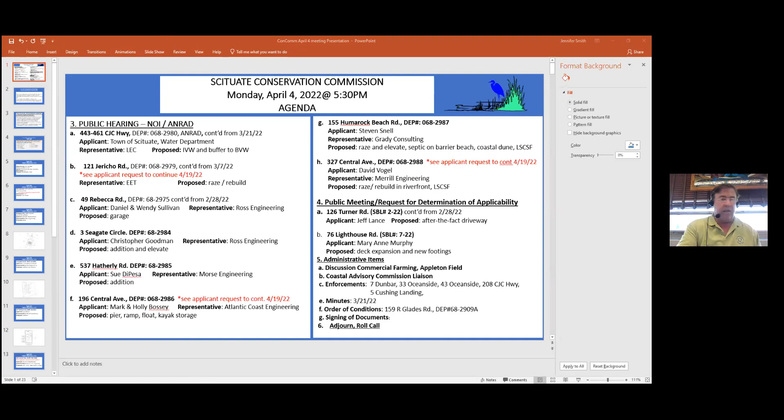Thank you. So we're going to go right to Mark Manganello from LEC. Just before we start, I know that there's been interest in this meeting, and I just want to make sure I explain clearly that this hearing this evening is only to delineate, accept a wetlands delineation line. This has nothing to do with any proposed project or whatever early stages.

In a format like this, the first thing that happens is that we establish what we would consider to be resource areas and delineation of the wetlands. That's all we're going to be doing this evening. There's no discussion about any other possibilities or whatever. It's strictly what we call an ANRAD for that. So the applicant is the town of Scituate, and their consultant for this project is Mark Manganello.

So Mark, if you want to explain what you've done so far. Thank you. Yes, again, I'm Mark Manganello with LEC Environmental, representing the town with this ANRAD application. As has been indicated, this is an application seeking to confirm wetland resource area boundaries on this property. It's located on the west side of Route 3A, just north of Tack Factory Pond. It's undeveloped land at this point.

We delineated the resource areas out there last fall into the winter, and the site contains a few isolated vegetated wetlands which have formed in historic test pits or other land disturbance that's occurred out there over the years. And then there's a more traditional bordering vegetated wetland that is associated with the pond, and riverfront area associated with a perennial stream which flows into the pond at this point, where there's sort of a dog leg on the southernmost portion of the property.

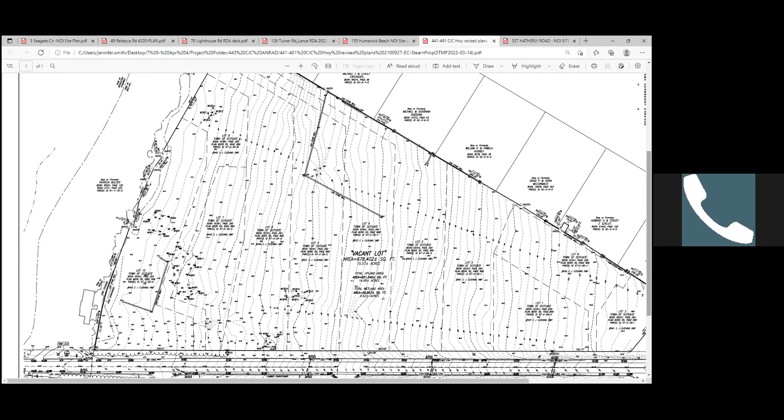So the main resource area is Tack Factory Pond. But when you look at this plan, there are a few areas, maybe more in the southern section, maybe one sort of centered, that have a bunch of WF flaggings around them, making some kind of circle. Those areas are what we consider isolated wetlands, not joined directly to the pond or anything. You'll see a few little spots around the property with wetland flags, and they're relatively small. As Art pointed out, they're probably depressions from some site work. There's maybe a bit of a larger one down towards the little stone wall section to the south, a couple of bigger ones closer to the pond, and then a few other small ones. That's how best, I guess, to explain those.

Okay, let me start with the members. Penny?

Or Amy, do you want to address any more of this? No, I mean usually I would say we've got Art here, but Art went right into it, so I don't really have anything to add. Let's go through the members first.

Okay, so Penny? Can you hear us? I know Penny was having those technical difficulties. Is she still on, Jen? Well, I'm gonna jump from Penny to Jen.

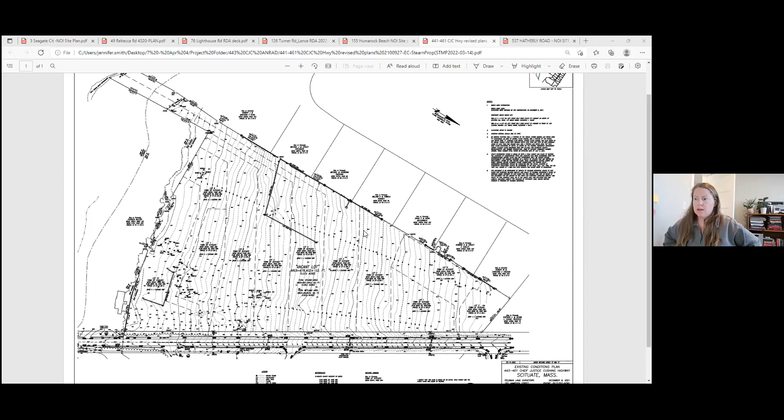Yeah, I think it seems relatively straightforward from a resource areas standpoint, because that's specifically what we're talking about today. So I think I'm good.

Okay, Andy? No, I appreciate the effort that went into the review. It looks straightforward enough to me, no questions. Brendan? No, I'm good with what I'm looking at here, and I have no additional questions on this.

Okay, do we reach Penny? Yes, I'm here now. Yep, Penny, do you want to comment on this? No, I think everything looks good. Years ago we did an ANRAD here too, Frank. Yeah, a couple of them, I think. Well, we definitely did one for a development, a big development. Anyways, no, it looks wonderful to me.

Thank you. I think 'wonderful' should be described in the sense that everything seems to be consistent with what's on the site. Yes.

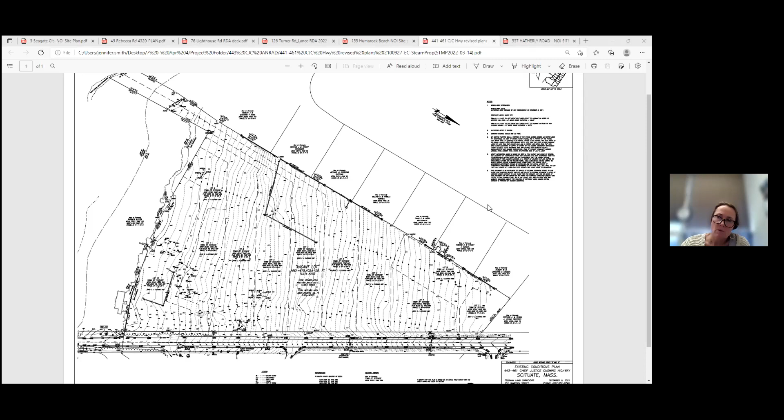Do we have anybody in the audience that has a question? I see David McCormick, I'm gonna unmute his microphone. Okay, and again I just want to explain that questions for this should be directed towards either the delineation or the process of delineation, or some procedural piece. Hey, Dave.

Hey Frank, can you hear me? I can. Hey Frank, how you doing? It's Steve McCormick, 5 Old Forge Road.

Steve McCormick, I'm with Dave. There's 30 people texting me saying they can't get into this meeting, and the website says it's an April 7th meeting. So there's two meetings. I'm at the Conservation Commission website, and it was changed today to say the 7th.

Our regular meeting is open to the public, and they should be able to get in unless they're trying to get into the 7th meeting. If you go onto the Conservation Commission website... we're looking right now but I don't think we're seeing the same thing. Well, I have people texting me saying it says the 7th.

We're at town hall. I'm at town hall with the staff. I went down there and spoke to the staff and asked why it got changed, and they said it didn't get changed. When I went back, it still says the 7th. I believe there's a meeting on the 7th that the DPW is putting in. I understand, but there's people texting me saying they can't get in.

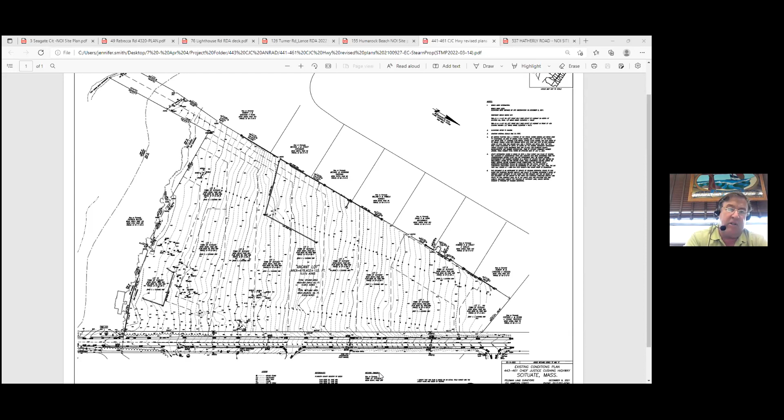So the area to avoid is basically along the edge of Tack Factory Pond. You can see sort of where the Ferrera home is and the property line that runs along there. There's a series of flags. Amy, do you or Jen have the ability to run a cursor along those? Yep, so it runs right along, that's the main area - why don't you explain it a little bit, Art, if you wouldn't mind?

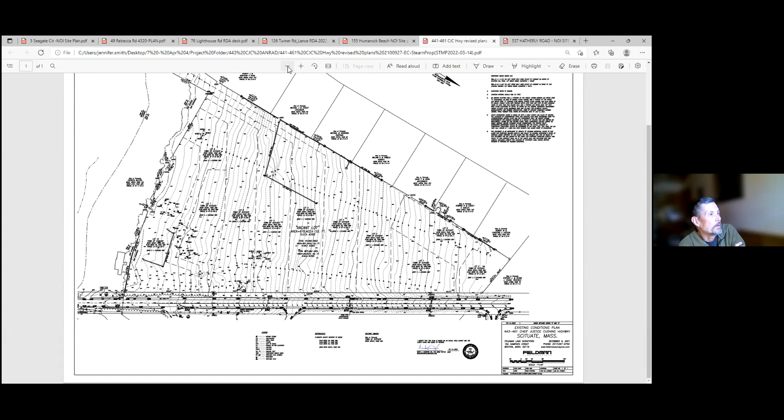Sure, Art Allen from EcoTec. That's actually the flood zone along the property to the south. So there's a flood zone between this property and the actual Tack Factory Pond.

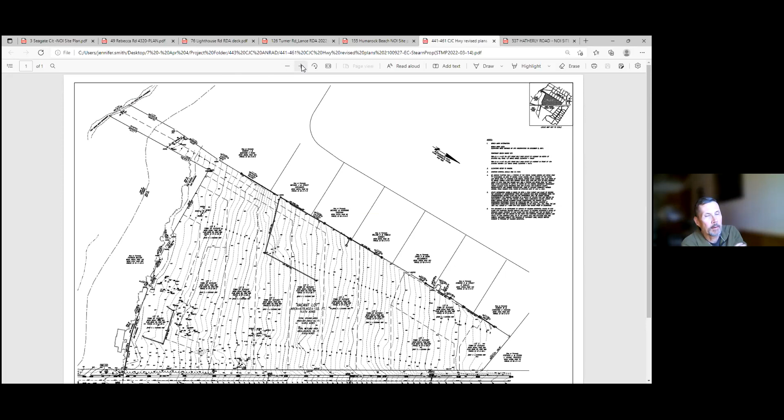Can you elaborate on those zones as well, Art, just so people understand what that means? Yeah, so Tack Factory Pond is way off to the south where the cursor is, and then heading north towards the property, there's the flood zone, which is the 100-year flood zone, also known as bordering land subject to flooding, and that's about at the southerly property boundary.

And in that little section right in the middle there, there's actually a strip that goes all the way down to First Herring Brook feeding into Tack Factory Pond. There's 3 flags associated with a bordering vegetated wetland right in the middle of that narrow strip. And the 200-foot riverfront area, another resource area associated with First Herring Brook, comes up just inside the bordering vegetated wetland. So that's the extent of bordering vegetated wetland and riverfront area on the site.

Then the rest of the areas that were delineated are what we call isolated vegetated wetlands. There's a number of them on the site - there's the C, D, E, and F series, all down in that south and southeasterly part of the site.

And then we found and added 2 additional series, the G and H series. The G series is up in the southwest corner towards the narrow strip on lot 8, just above where it says Town of Scituate. The H series that was added is down between lots 5 and 6, closer to Chief Justice Cushing Highway.

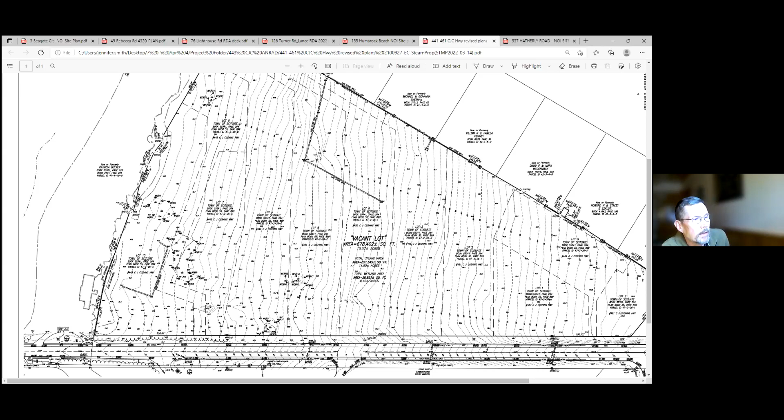Mr. McCormick, when you get a chance to look at the plan, you can go to each one of those wetlands areas and you'll see the letter in it along with the numbering, and it shows that circle, and then little tufts of grass or marsh within those areas to help identify that.

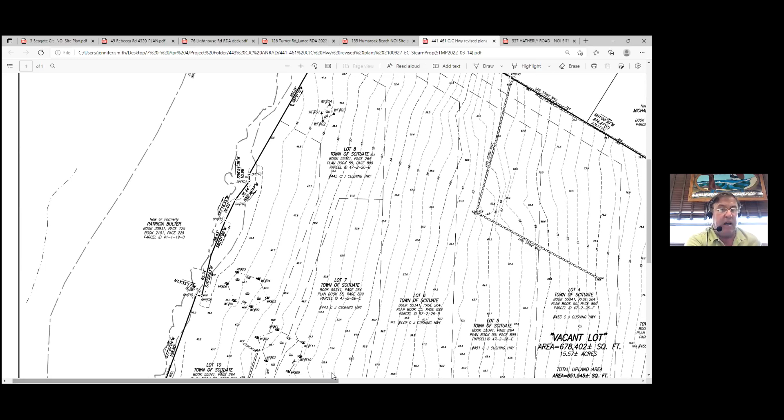To Mr. Allen's point, the isolated wetlands are part of our bylaws. So in addition to what the state requires, we have a wetlands bylaw that lets us identify these isolated wetlands, and they have to be dealt with in accordance with the bylaw. I don't know if that helps or not.

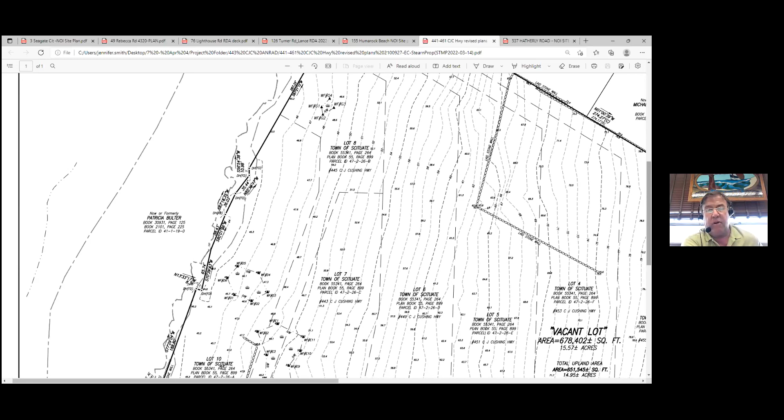Yeah, I think it helps. I follow you at some level. It's tough without the flagging to see exactly where the areas are that Art was identifying, but I pretty much follow along. The good news is that they've really looked this property over pretty thoroughly - it's not just going down to the bottom and looking along the Butler property, they're looking through the whole site to make sure we identify these isolated wetlands as well.

Just real quick, I know you have a certain agenda, right? But if I was a builder and I was looking to do this, are you saying the bylaw protects some of these wetlands where a builder couldn't go in without having to change that bylaw to construct on those certain areas? Is that accurate?

No, and I don't want to jump ahead of this too much, but say in the case of a 40B project, they negate town bylaws in a lot of instances. So isolated wetlands don't have to be observed with that type of project. Sometimes, but in the case of something that's not like that, then the isolated wetlands have to be addressed and dealt with, and they can either have a buffer and be left alone, or they might reconstruct another wetland in another location, in a larger size or with some other benefit.

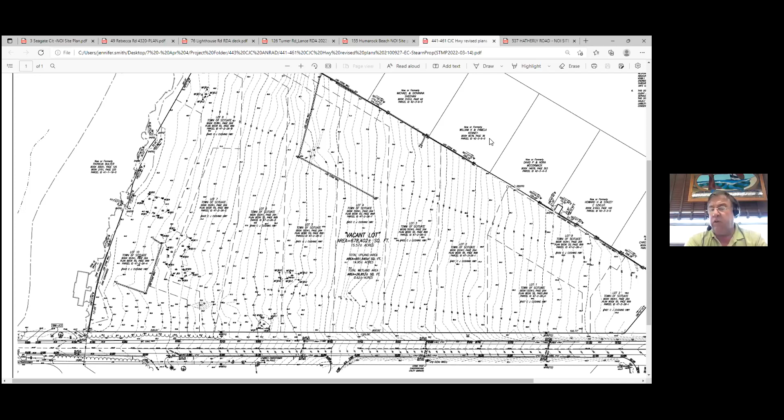Do you look for like natural heritage when you look at something like that, Mark? Do you guys look at that as well, or at? I mean, we review the maps, but the ANRAD process does not confirm the presence or absence of rare species habitat as mapped by natural heritage—but this site does not contain it.

Okay, all right, does that make—are you good with that? Yeah, I concur, and I also checked the maps as part of my review, and I can confirm that there's no mapped rare species habitat, no mapped certified or potential vernal pools on the site.

Going forward, if and when a project is put forward, that's the time when the commission can consider any thresholds or triggers for wildlife habitat studies that may come up as part of a project, which may or may not hit thresholds requiring that wildlife habitat studies be done. But that would be related more to the actual development, which is not up for discussion tonight.

Well, we don't even know, it's not on a plan, so we don't have anything to respond to. But I can tell you that in the case of other sites, we look to what we call natural heritage, because they have maps available that say these are the areas you want to consider for a turtle issue or some other piece. It doesn't mean if there isn't something on there that we couldn't deal with it separately, but that was the whole purpose in having Art and Mark and Amy walk the site to observe that, and both Mark and Art are pretty seasoned people when it comes to looking for that sort of thing.

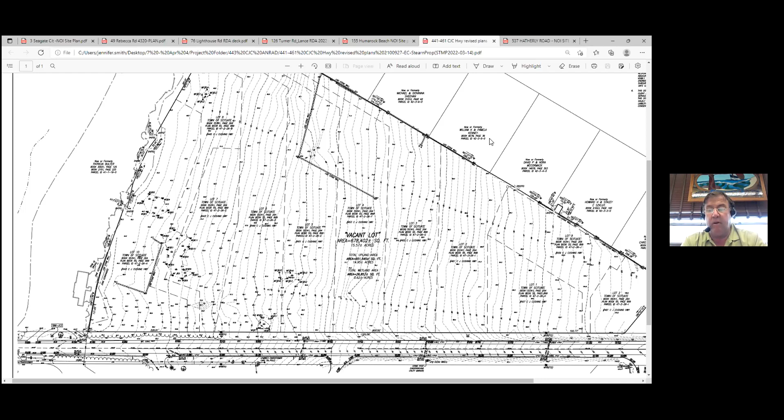Thank you, that's all very helpful. That answers all the questions I had. Okay, thank you, thanks a lot. Frank, I'm going to unmute Pat, who has her hand up, and stay tuned.

Good evening, Patricia Butler, 439 Chief Justice Cushing Highway. I just have one question, it may be a stupid question but I need to know. I know as you go up the highway you can see the water there in the land, but right down by my stone wall, quite often there's water there most of the time. I've always believed it was the test pits, and when they fill up, the water comes down. Is there any way they can fill up? Can you fill in a test pit or not?

Well, obviously they get filled in after they dig the hole, and then sometimes those pits settle. If there's a depression and it's large enough, that could potentially become an isolated wetland. So they couldn't just go in and fill it.

Now that we have this all mapped out, we know where these isolated wetlands are, and they should not be altered until a project comes along. And then if for some reason they want to do something with some of these, typically they would have to replicate those in some fashion, but that's not what's on the table right now. We want to know where all these pieces are.

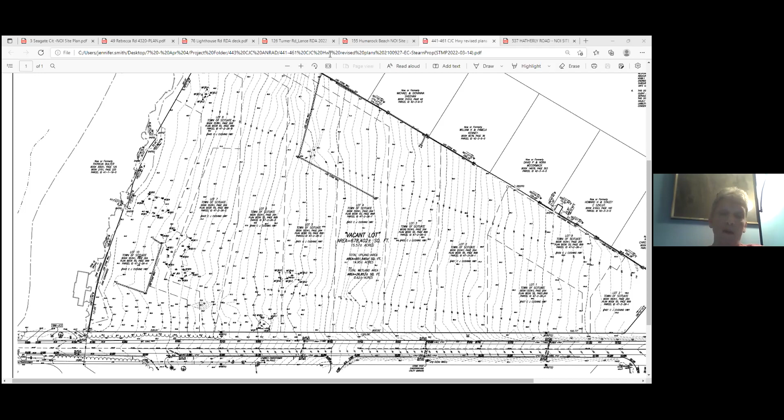Do we have anybody else? I see no other hands, Frank. Okay, want to take a motion? I think if everybody is comfortable with the answers. I'm good, okay, all right. So I'd like to take a motion. I make a motion that we accept the ANRAD, it's Penny. Do I have a second? Second from Jen, thanks Jen.

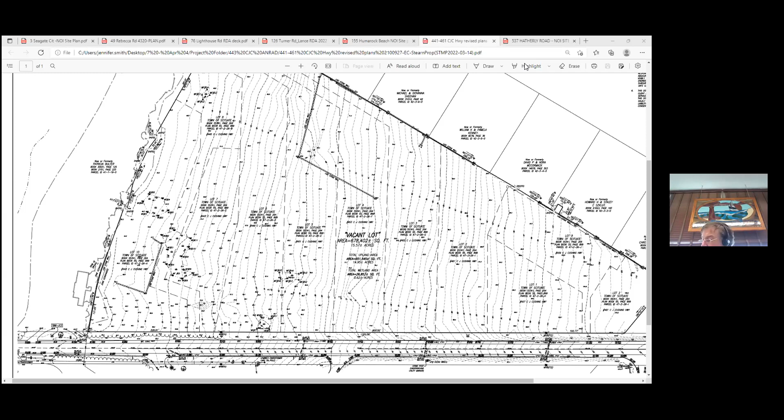So all in favor: Andy, yes. Brendan, yes. And Frank, yes. Great, thank you very much. Thanks Art, thank you Mark, right now, have a good night.

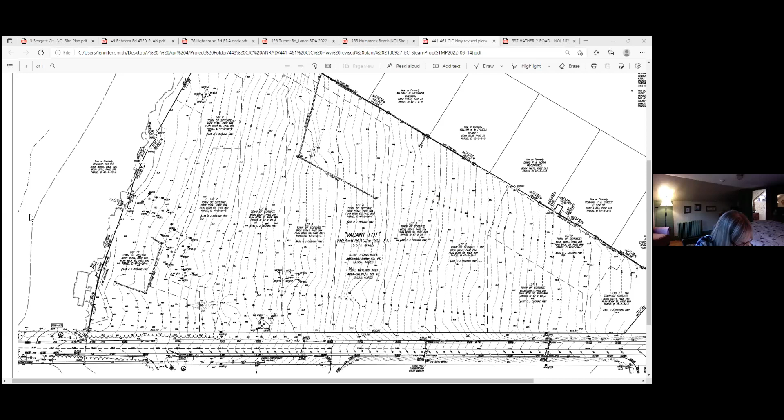Okay, 121 Jericho Road. So the applicant's requesting a continuance to April 19th. You want me to make a motion? That would be awesome. I make a motion that we continue 121 Jericho Road till April 19th. Second, and that was Andy for second.

So all in favor, Jen? Yep. Brendan? Yes, thank you. And Frank, yes. Great.

49 Rebecca Road, this is Ross Engineering, and this is a continuance. I'm going to unmute Paul Mirabito. We have to.

Can you hear me? I can.

At the last meeting, commission was going to arrange for a site visit to go out and view the site, and I never heard back from anyone, so I don't know if the members looked at it individually, or if someone else did, but I did.

Okay, sorry about that, Paul. I don't know, I know that I took a look, I think a couple other folks did as well. Alright.

Do you want to give us any additional information, or we can go to members for some more discussion?

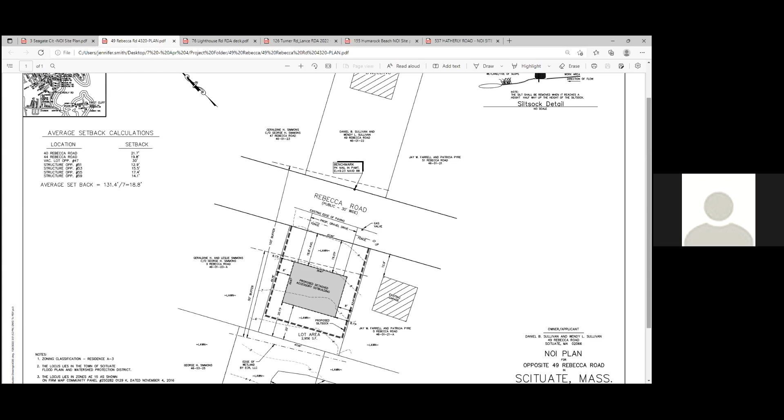The wetland line flagged by Brad Holmes is shown off-site to the rear of the property. That's the lawn area, but in his report he was able to determine the soils, the color of the wetland soil, and the groundwater elevation to determine where the edge of the wetland would be if the lawn area were not being mowed and allowed to grow back. You can also see the edge of the existing Phragmites to the east of that line, which we located by field survey.

Other than that, the area off-site is pretty much all lawn, maintained by the various property owners as well as the locus itself. There's no changes in grade. This will be a slab on grade, and he'd access it from Rebecca Road as shown on the plan.

So with that, I'll answer any more questions the commission may have. Thank you, Paul. Amy, do you want to speak to this anymore before I flip over to members?

Well, I gave a pretty thorough breakdown last time. I think it comes down to a couple things. One, clearly this lot has changed over time with filling and lawn establishment, whatever, but the building would be within the 50-foot commission do-not-disturb area. So that's something we want to remind you of. Also, if a building were to go here, the accessory structure would need to meet building code for coastal resource areas, which I do not believe is a slab on grade - I believe that is some type of elevation.

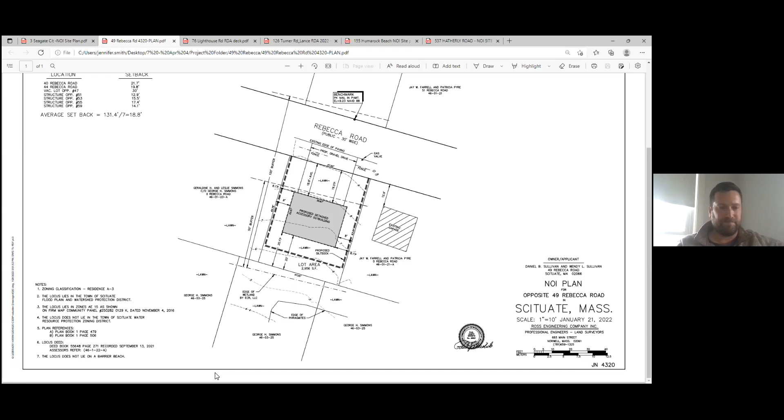Yeah, I echo the same sentiment. This is in the 50, and I know it's been disturbed, but we're putting a structure here. I think that's different. I want to know why we should be doing this.

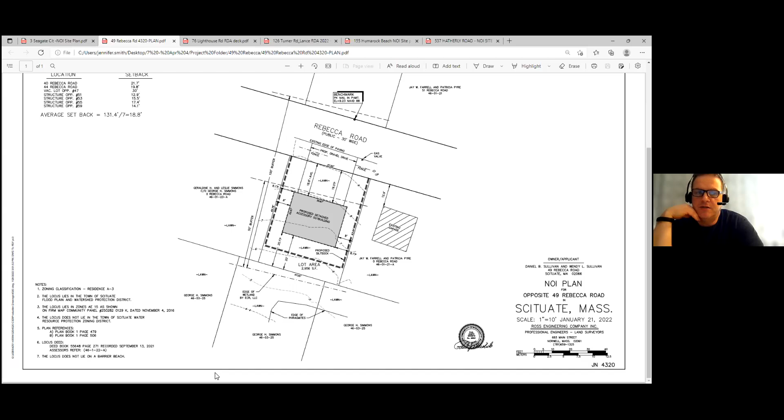Okay, Penny? Yeah, I'm with everybody. It's not just a part of the structure in the 50, the whole structure's in the 50 on a slab, to make it even worse. Yes, there is lawn out there and they probably mow it all the time, but that area of lawn can take in water. A slab cannot take in water. And I know there's other garages over there. I have no idea how long they've been there, probably since the 60s, 70s, I don't know. But to allow a new structure, everything in the 50 just goes completely against it. I do not feel it's a good idea.

Thank you. Okay, do we have anybody in the audience to speak to this? I do not see any hands raised, Frank. Okay.

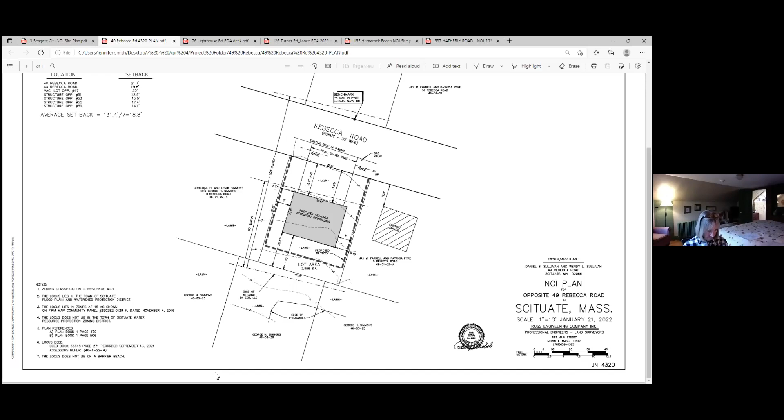Well, I took a ride by there as well and noted, as you did, there's boats parked there. It's all grass, pretty much an altered area. Actually, a little bit further over, the lawn stretches out even more. I don't think it's on your client's property, but next to that there's even lawn that— excuse me one second.

Sorry about that. Frank, if I can, I'd like to make a few comments for the record prior to ending this. As far as the resource area, the locus is in an AE zone — that's land subject to coastal storm flowage. A structure such as this is allowed to be on a slab. This is not a dwelling. Many homes are in flood zones where the dwellings are elevated on piles or posts and columns, and the garages are lower in elevation. They're actually in the flood zone and on slabs, which is allowed by FEMA. This would be a similar structure.

The other thing I'd point out is, as you all know, this whole lot is already disturbed. It's being used, it has been used. The structures on this side of the road go back to the early 1900s — that's well documented in town records. The other thing is, there are no performance standards in land subject to coastal storm flowage.

But the thing I'd point out here is that the runoff from this roof is considered clean water. It isn't like it's going to be polluting any resource area. If there were a performance standard, what you'd be looking at is whether or not the proposed work is going to harm the resource area, and the answer is clearly no — it wouldn't, because the only runoff is coming from the roof, and everything else around the building would stay in the exact condition it is now, that being a lawn area. I don't see any way there could be an argument made that putting this structure here would have an adverse impact on the resource area.

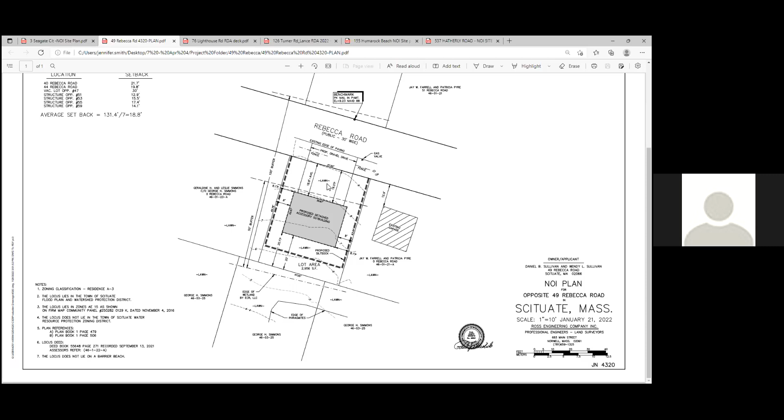The other thing I'd point out is I believe the 1907 plan, on record at the registry, showed an old structure on this property. It's been gone for probably several decades - not that that matters - but there was a structure there going way back when the land was first surveyed, when they laid out the lots along Rebecca Road.

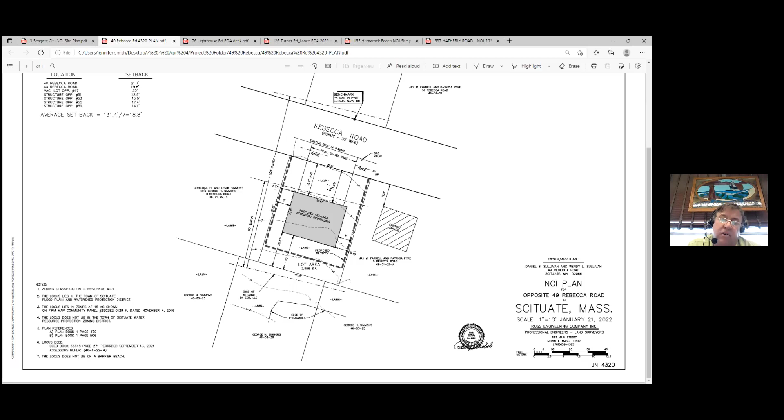Have you ever had a discussion with the building department about the possibility of putting the garage closer to the street, to get at least part of it out of the 50-foot buffer? I know that doesn't do much in terms of a ramp or access. Right now, from the edge of the pavement, it looks to me like there's at least, I don't know, 30 feet or something like that, maybe a little better.

The front yard setbacks in this district are 30 feet from the property line of the street. It isn't measured from the edge of the pavement, it's from the property line. I understand how that works.

I guess my point is I'm thinking about a house on Hadley Road that got conditioned. The applicant went to the ZBA because they had wetlands in the back and had no way to build that house without being partially in the wetlands. So they went to the ZBA first and requested relief because otherwise their project couldn't be built. I'm just throwing that out there - would the ZBA allow something like that? Go ahead. The 30-foot setback, we use the average setback, which was 18.8 feet, which is allowed in the zoning bylaw. I see that, yeah.

So, given that the town has a 50-foot no-build buffer, would the zoning board of appeals give you additional relief to get at least part of the structure out of the 50-foot buffer? And then, possibly, given free flow underneath the garage, blocking off the sides with some shrubs so it's only lawn or grass, and then possibly plantings at the rear of the property to give some additional mitigation. I mean, it's a long way to go to get some of that, but those are the kind of things I'd be thinking about if this were to be conditioned.

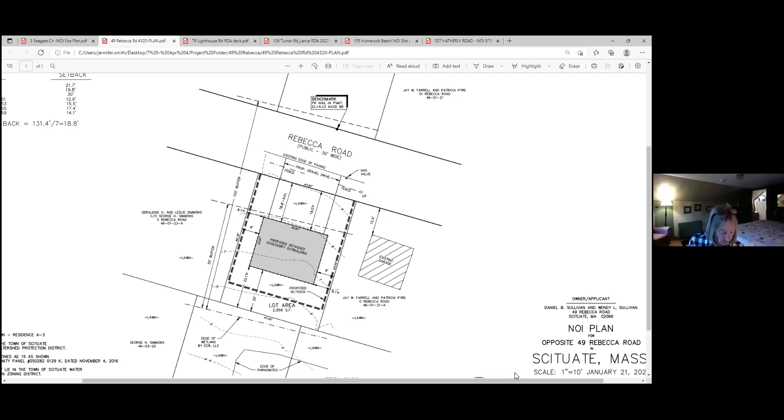Okay, do you think that's enough time to do what you need? Frank, we don't have room on the 19th meeting at this point, so I would go to the May 2nd meeting. Okay, can I get a motion for that? I make a motion we continue 49 Rebecca Road to May 2nd. Do I have a second? I'll second that, Brendan. Thanks, Brendan. All in favor? Jen, yes. Andy, yes. Frank, yes. Okay, thank you.

Thank you. 3 Seagate Circle. Oh, all right, you're back already, Paul.

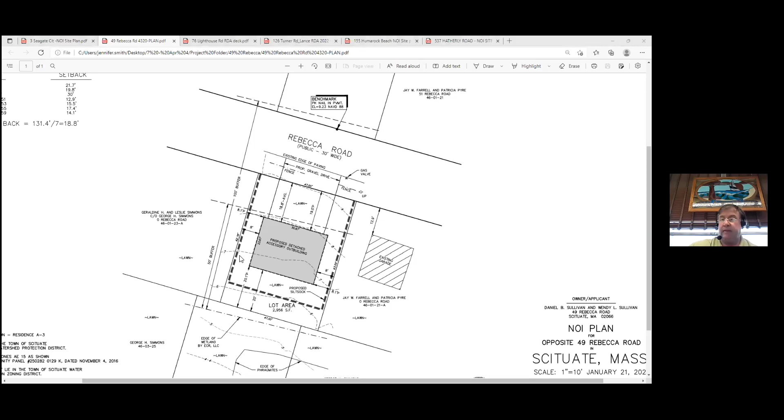That's already. I didn't get very far, did I? We need to open this one, though.

On April 4th, 2022, 5:30 PM, the Town Hall, Scituate Conservation Commission will hold a wetlands hearing under Chapter 131, Section 40 of the Mass General Laws and Section 30700, Town of Scituate Code of Bylaws, regarding the application of Christopher Goodman for work related to elevating and building an addition to a single-family dwelling at 3 Seagate Circle, Scituate. Abutters and other interested parties are invited to attend. Information to access the virtual meeting will be available on the agenda posted on the town website.

Thank you, Frank. I believe with me also is the applicant's attorney, Bill Weinberger. Jen, are you able to share the plan? Okay, thank you.

The applicant owns the existing dwelling at 3 Seagate Circle, on the corner of Surfside and Seagate Circle. If you're coming down Surfside Road, it'll be the very last house on the right. If you look at the drawing, you can see how the edge of pavement on Surfside Road actually goes into the lot a small amount. It's kind of an odd layout, but it is what it is.

The applicant purchased a home. There was a small addition on the back of it. They approached the building department 2 or 3 years ago to renovate it, and in the course of renovation it was determined that the structure was not sound and they couldn't do the renovation. So the back portion was razed, and in its place they put a second story on top of the existing house, which was outside the floodplain.

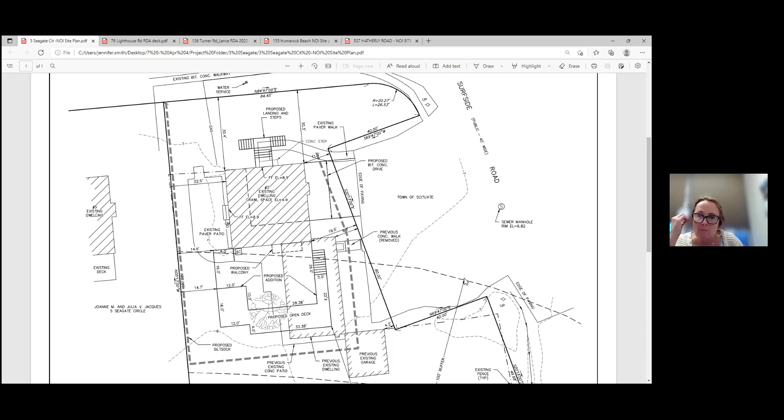We did take a look for previous filings on this property, and the only solid folder I came up with was from '92. It was related to storm damage from the No Name storm of '91 and cleanup associated with that, with the moving of the berm. As we know, that berm does move, although now that it's been rebuilt it's pretty sturdy, but it is subject to coastal storm damage, and the intent of having a cobble berm is so that it can move, shift, and migrate as the storms go through and absorb

wave energy and storm damage. A few other comments - I have a lot here, folks. The work to remove the back portion that they want to replace for the addition - I didn't find any permits associated with that work, which appears to have been done in 2019, like Paul said. Also noting the existing shed on the edge of the pond, and we're also referencing past plans showing maybe at least a respectful buffer to the pond. I did not find permits for that shed.

So, I guess one thing we could look at would be trying to improve upon that buffer. Clearly, it would be an improvement to elevate this structure onto open pilings without footings. My read on that is that it should be driven wooden piles, not concrete piers. The properties along Surfside that we know, and also on Seagate, there's definitely marsh below where the houses are, so geotech borings would definitely confirm the sediment characteristics. I think that's a good start.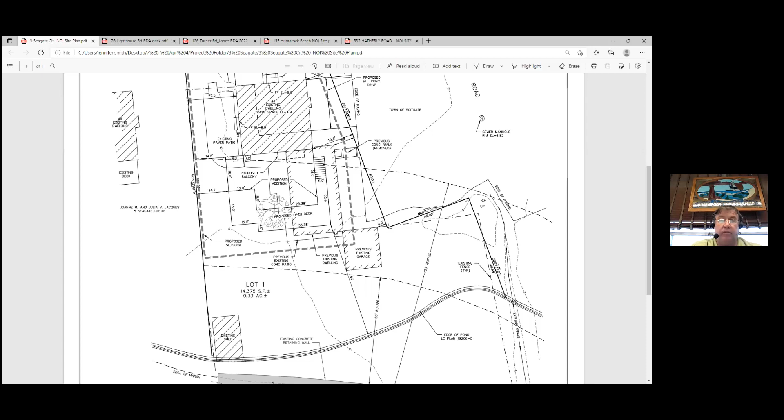So, Jen. Thanks. One thing I was wondering, and there was just a lot of talking, so it might have been said and I missed it, is when was the last time these resource areas were flagged?

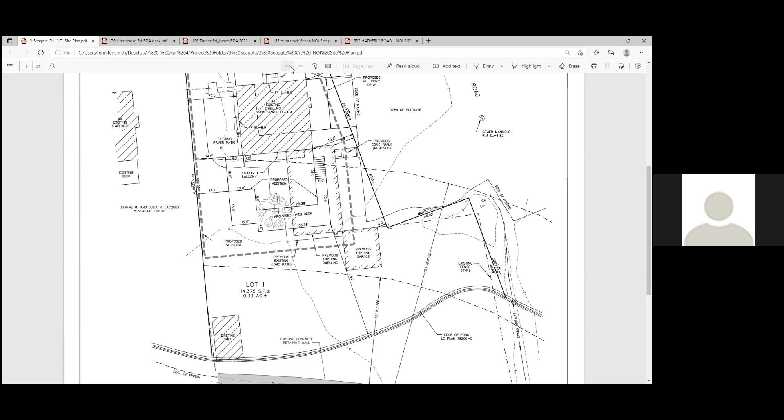We did a survey out there in 2018, and then we followed up with some work about 6 to 8 months ago, just to verify that there are no other changes in the property. But they're not on this map? We didn't find any wetlands. The edge of the pond was straightforward, it follows the edge of the wall. We also located the edge of the salt marsh, which was very obvious. From the edge of the salt marsh at high tide, you can see the edge of the pond. There's also a retaining wall out by the marsh itself, but the edge of the pond was from the land court plan, and that's where the buffer zones were measured from, the edge of the retaining wall, which is really the edge of the salt marsh at this point in time.

You said the buffer zones are measured from the edge of the retaining wall? Yes, so we showed that. I don't feel like I'm seeing that. Oh, it's there.

To the south of the... do you see the arrow? The concrete retaining wall. Yeah, but that's the wall - the 50-foot and 100-foot buffer. I thought you were saying the edge of the pond.

But the 100-foot buffer zone, Jen, is measured from that wall, which is about 2 or 3 feet above the marsh. Yeah, it's just complex. I feel like it'd be good to get somebody else's perspective on that, but it's hard to.

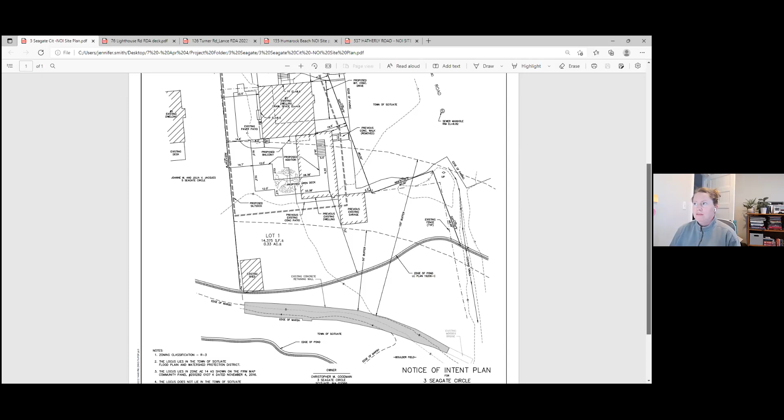Frank, I'm good, that's all lawn back in there. That edge of pond we show is what was on the old land court plan. The pond doesn't come back to there now - that's been filled in over time. Yeah, I'm pretty familiar with that area. Okay, which is why this map was confusing to me. All right.

Andy? Yeah, that's where my questions came from too. So you're saying that you've put the old land court line there, but that is no longer reflective of the site. That's correct. And when was that land court line established?

That land plan, I can check my file, but it's fairly old. And do we know what filled it in? Did someone fill it in, or was it natural? What happened to push the pond so far back?

This property is part of an old land court survey, and back when that survey was done, that's where they located the edge of the pond on the date of their survey. But now what you have is a concrete wall that's out much closer to the salt marsh than the edge of the pond was. Somebody built that years ago, and they filled the land in to get a bigger yard area.

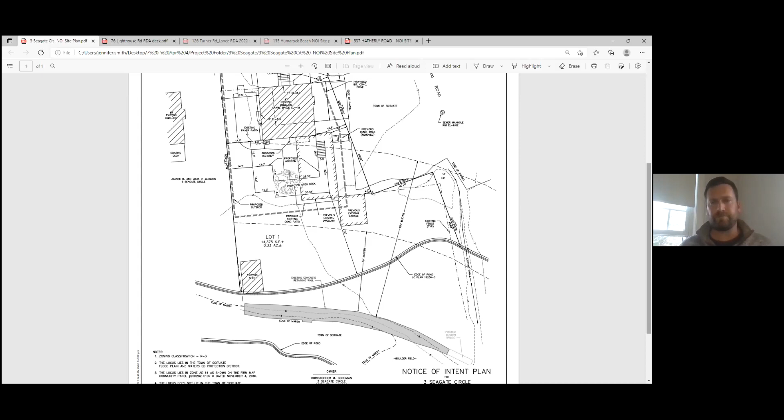Got it, okay, so it's been filled. Got it. Okay, yeah, that's my questions for now. Thanks, Andy. Brendan?

I'm confused by the edge of the pond thing too. Brendan, can I - the pond back in the land court plan was used as the end of their property line. Okay, all right. If you look at Surfside Road, you can see a dimension of 49.68 feet.

It went from an angle point up on Surfside Road, and it went to the edge of the pond that they located way back when. On the other side, over by the existing shed, you can see we stopped the property line at the edge of the pond that was shown on the land court plan. That had a bearing and a dimension, and their property line only went to the edge of the pond as they located it several decades ago.

Okay, and is that concrete retaining wall here? Yes. Yeah, it's the triple line. Okay, it's pretty old. Okay, yeah, I guess I'll have no further questions right now.

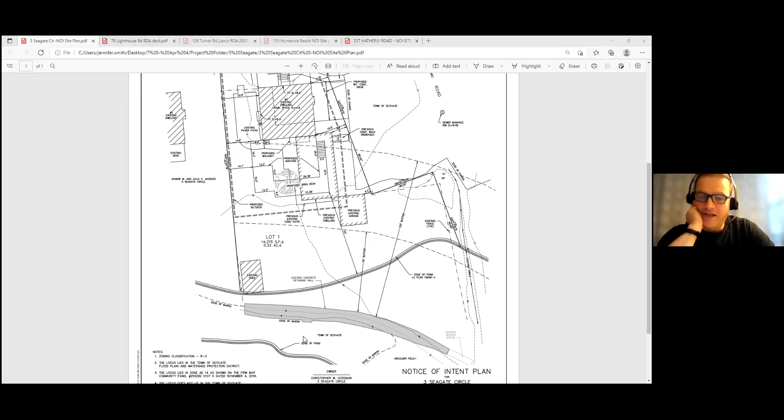Okay, Penny, did you comment yet? No, I didn't. But one thing is, I think we have to remember that every major storm until they rebuilt the berm, cobble was being washed into the pond. So I think the contours of the pond over there have changed dramatically. Okay, and if we get a huge northeaster, some of that cobble will start to come down again, and we cannot remove it. We have to remember that.

So after saying that, my biggest concern here is that existing shed. It really needs to be moved, Paul. The rest of it - the building, the addition, putting everything up on piles - that's all good. I don't have a problem with that, but I do not like the shed way back there.

Why do you need to move it? It's been there for a long time. Because I'd like it moved. How's that? It would just be nice to move it. It might have been there for a long time, but that's not a good place for it. It's not a good place. You're in the buffer, the 50-foot buffer, and I want everything out if it can be.

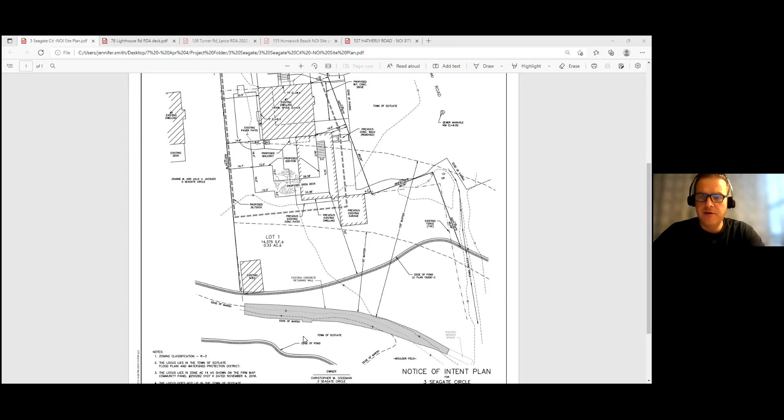Yeah, I did want to - I forgot to mention - echo the sentiment of the shed. But what's a long time? It's probably been there for decades, as far as I could tell. Yeah, but since the 70s, it shouldn't have been there. Well, that's like 5 decades. Okay, not a big deal, move it.

Do we have any other commission members? Looks like Mr. Goodman would like to speak to this. Let me unmute Mr. Goodman.

This is Chris Goodman, owner of the property at 3 Seagate. I'm actually raising my hand on behalf of Bill Hornberger. He's having a hard time raising his hand and he wanted you to see if you could unmute him.

Thank you. Can we find Bill? Yeah, I see him. I've identified him and I'm asking him to unmute. So, oh, he should be on.

Hello. Good evening, Bill. Thank you. Yeah, but just a couple things that I'd note.

As far as the existing shed, because I was just asking Chris, with the limit being in the floodplain, limits of storage, that's an important attribute for him and his young family. One of the questions, Joe, just to put it in this perspective, and I heard this is Chris is doing exactly what the beck and call has been in the town of Scituate to make his house flood compliant, to lift it higher, to move structures and things further away from the resource areas.

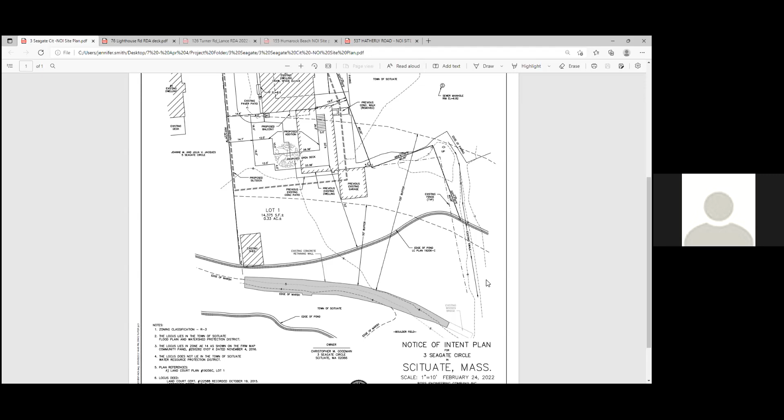Right, I just want to point out to the members that the edge of pond is quite a ways away. Oh, it is, yeah. Okay, there's a pond, and then there's a marsh, and then there's the wall, and then there's that other line you're showing, edge of pond. So that's just from an old plan. Okay. Anybody else?

Bill? I've got Christopher. Oh, all right, Goodman. Chris, the owner would like to have a word, I guess. Mr. Goodman? Yeah, thank you. Bill and I are tag teaming because he was having a hard time raising his hand, but I can answer a couple of things there.

The point you just raised is an important one. The shed looks like it's sitting on top of the pond. It's not—it's quite a ways back. And the reason we didn't move it, we looked into moving it, is where you said, Penny, where it says 'previous existing garage.'

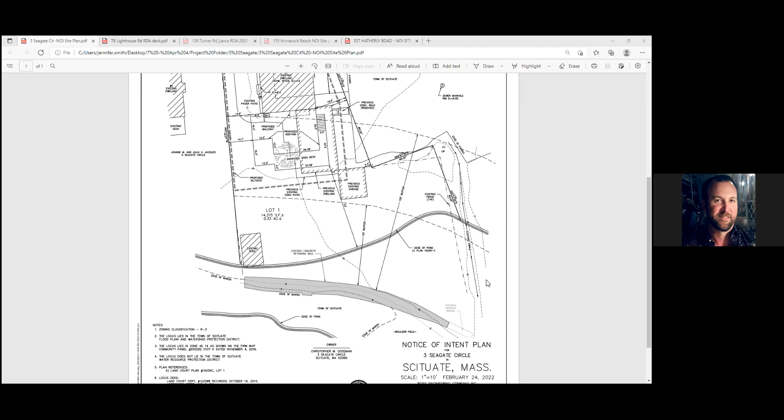That is actually where water runs off across the driveway in the most severe storms. It doesn't come from the pond or from the berm. There's a house across the street on Surfside that has this funky wall system that diverts the water, and it goes directly into that garage spot right there. The safest place on the entire property for that shed area is where it is. That's the driest. In those worst case scenario situations, I've lived there for 7, on the street for 10 years.

I'm happy, as Bill said, I'm doing everything I can to make this house safe for a long time and compliant. So I'm happy to move it a bit. There's not a lot of spaces for it to go, but if that's an option to push it up towards where the house is along that property line, if that would be feasible, it's way more expensive than you'd think. I've looked into it, but I'm happy to do that if that helps close this out.

So the other question, just the concrete piers, is just storage is at a premium, and the more our cars get damaged from the salt in the air. So the concrete piers give us a little bit more options about the skirting that we might put around there to add a little better protection for things under the car, so I'm not buying cars every 2 years because of salt in the air. That's all. It was just better.

And moving the house, we just did a bunch of work on the house. We were trying not to move the house and minimize the disruption to that. So that was a couple of reasons why we chose the piers versus the driven piles.

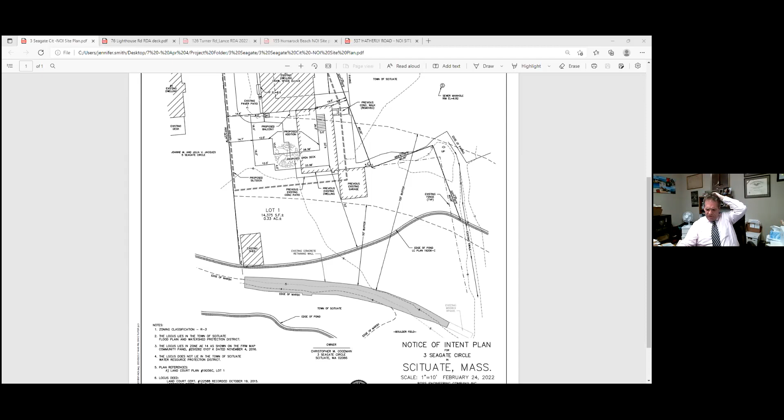Frank, what I was just talking about is we'll take an extension to May 2nd, and we'll get the information to show that the piers are okay, and we'll also submit some proposed vegetation on that. So I think if we do that, then it's clean - you don't have to condition to that. Does that make sense? We've got a pretty full schedule, but I think if it's that simple, can we do that? May 2nd? May 2nd is definitely better than April 19th. Okay, all right, good, let's do that.

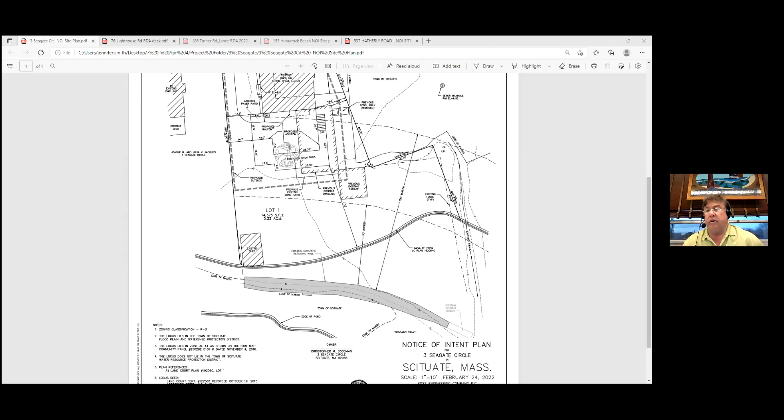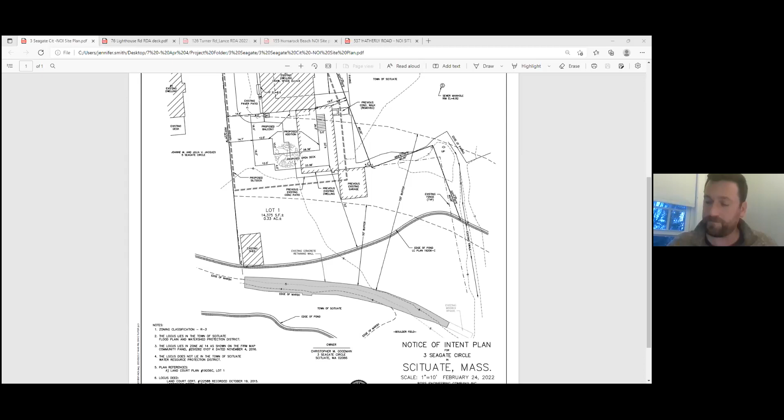Okay, I'll take a motion. So I'll make a motion that we continue 3 Seagate to May 2nd. Okay, that was Penny. Do you have a second? I will second that. Thank you, Brendan. All in favor? Jen, yep. Andy, yes. Frank, yes. Thank you very much. All right, thank you, good night.

So we're going on to 537 Hatherly Road. On April 4th, 5:30 PM, the Town Hall Scituate Conservation Commission will hold a wetlands hearing under Chapter 131, Section 40 of the Mass General Laws and Section 307.00 Town of Scituate Code of Bylaws regarding the application of Sue DePisa for constructing an addition to a single-family dwelling located at 537 Hatherly Road, Scituate, Mass. Abutters and other interested parties are invited to attend. Information to access the virtual meeting is posted on the town website.

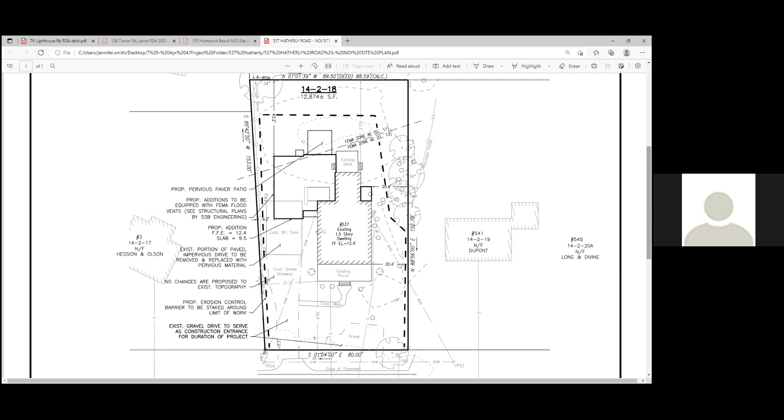We have anybody in the audience? Seeing none. Great, I'm good with this.

So I can make a motion to close. You could. I make a motion to close. Okay Penny, we have a second. I'll second that, thanks Brendan. Maybe a motion to issue too. How about that? Okay, make a motion to close and issue. I will second that as well.

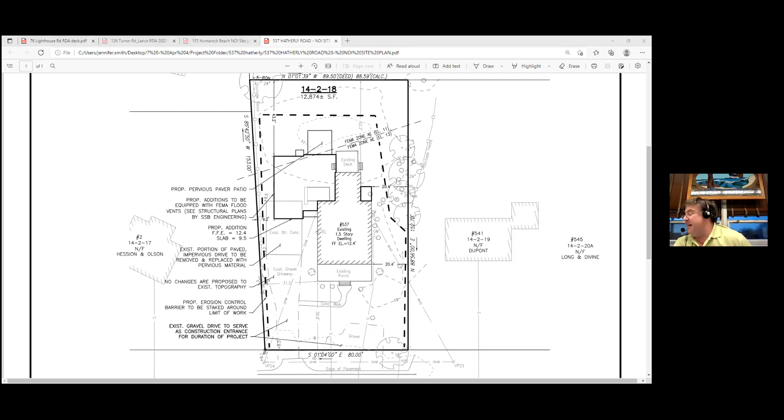Andy? Yes. And Jen? Yep. Frank, yes, great. Thanks, Greg. Thank you very much.

So let's see, one. 196 Central Ave. Yes. I make a motion we continue 196 Central.

Oh, let's open it first. Oh, you gotta open it. Go open it.

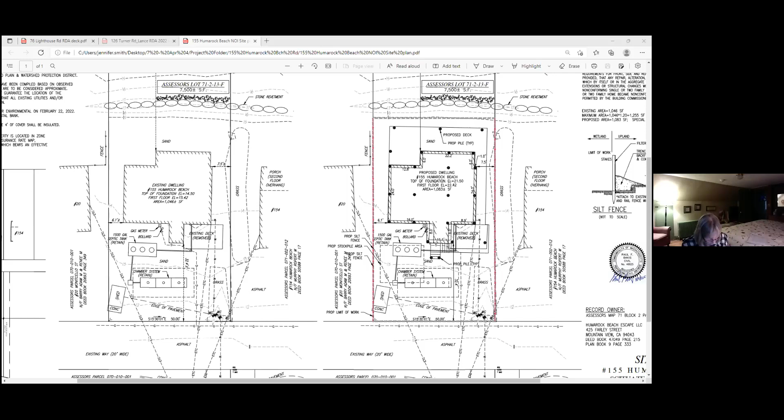Do you, either the engineer or Paul, want to answer? I'm glad to unmute Paul and let him answer some of these, or Grady, whoever wants. Paul can weigh in. Okay, Paul Armstrong can weigh in. All right, let's just try to stick right to the questions, Paul.

Can we unmute Paul? I don't see the option to unmute Paul, I just see the camera and lower hand. Paul, are you in as somebody else too? Is there a phone number? Should be good now. Hello? Got you, yep, can you hear me? We can. All right, hi, Paul Armstrong, 33 Reeves Road in Marshfield.

Just to answer your questions, Renee, any of the material that we're bringing in after the house is elevated in the air, all the concrete block is going to be removed, and we typically bring in perk sand. That's just the preview of what we've always done. It's a compatible sand for the beach. As for rodent control, the house has already been gutted by Steve Schnell, the building company, so there's nothing inside it at this point. This has triggered a substantial improvement, which has caused this to get elevated. Regarding rodent control, in my history working on Humarock Beach, I've never seen any rodents down here in my almost 40 years in business. But everything we're doing is no different than any other project we've done on this beach for these past several decades, and it's going to be clean and quick. No grades are changed to be proposed differently than what's there, just tying everything in.

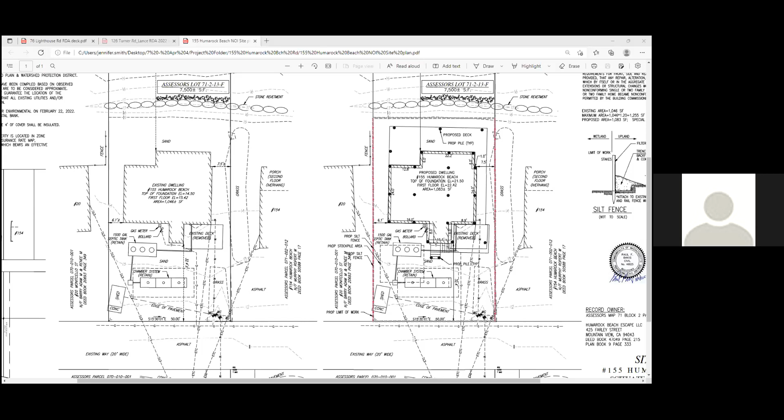Are there any variances being requested? I don't think so based on what you were saying, Frank. Amy, we don't have any variances for this, right? It's pretty straightforward. Paul Backus can answer that. No variances are being requested.

All right, Paul, next time see if you can get your audio removed. Okay, the video rather - we've got a good shot of your right ear. Yeah, good, thanks.

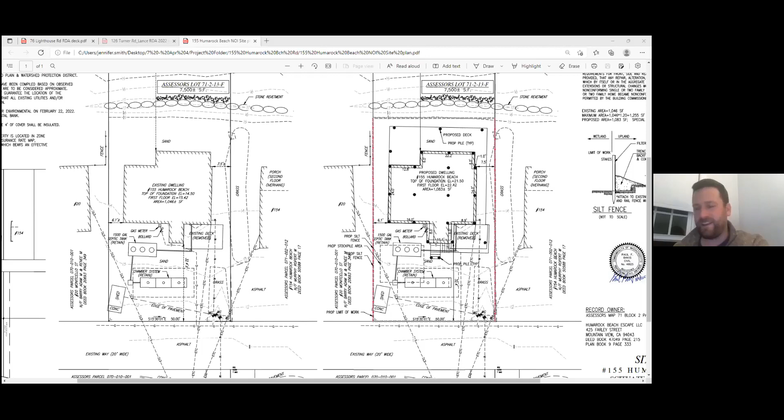Anybody else? Seeing none, Frank, okay, I'll take a motion. I make a motion to close 155 Humarock Beach. Great, thank you, Penny. We have a second. Second, Andy, thank you. All in favor? Jen, yes. Brendan, yes. Frank, yes. Thank you very much for your time.

Have a good night. We're at 237 Central Ave. Yeah, they're gonna continue. Did you open them yet? Can I do that? Yeah, I think you have to. Thank you. You're welcome. Good.

On April 4th, 2022, at 5:30 PM in the Town Hall, the Scituate Conservation Commission will hold a wetlands hearing under Chapter 131, Section 40 of the Mass General Laws and Section 30700, Town of Scituate Code of Bylaws, regarding the application of David Vogel for work related to a tear down and rebuilding of a single-family dwelling at 237 Central Ave, Scituate, Mass. Abutters and other interested parties are invited to attend. Information to access virtual meetings is available on the agenda posted on the website.

Okay, and I will make a motion to continue 237 Central Ave to April 19th. Is that good with everybody? Okay, yeah, that's the request, without further discussion. Second, Frank. As we move into the public portion of this for the RDAs, what are we looking for?

Okay, we're going to try to take 76 Lighthouse prior to 126 Turner. But we gotta finish the continuance - oh, I thought you already did, sorry, no, we need a second. Second from Jen, thanks Jen. All in favor? Andy, yes. Brendan, yes. Frank, yes. Thank you. Okay, now we can do that, so we're gonna go 76 Lighthouse first.

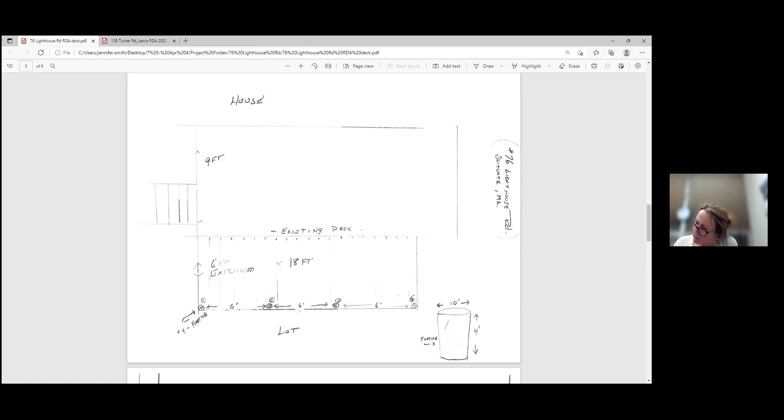So it's in land subject to coastal storm flowage, obviously, and with sonotubes, it looks like it meets the requirements of a negative finding. Jen Foley - yeah, sounds good to me. Andy - yeah, I think it's okay.

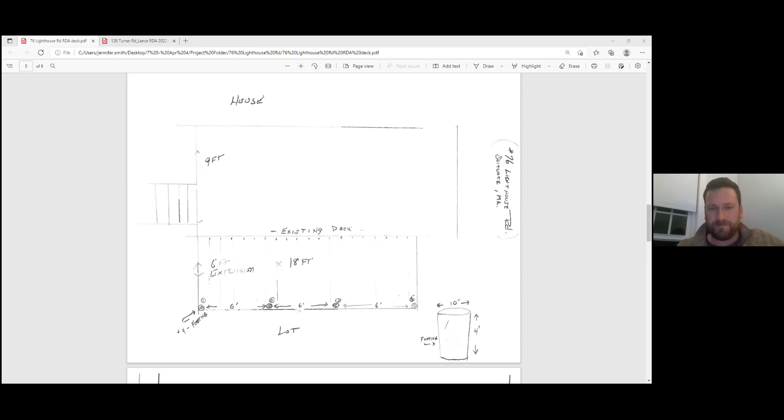I mean, do we need to say anything in terms of water flowing, like about what goes on the side of the deck? It's fine with the deck being up, but do we need to determine anything to make sure that whatever's put underneath allows water to flow? Well, it'll be the same as the existing deck, which has gravel underneath it. Are you talking about the lattice? Yeah, lattice for lack of a better word. We'll just do the same lattice. Water goes through it.

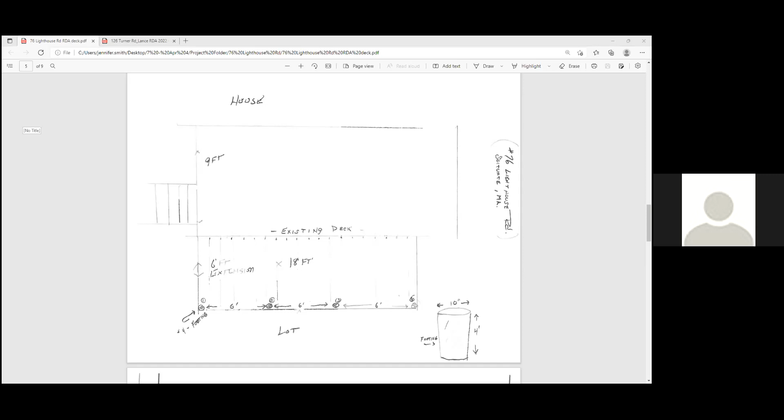Is it wood or plastic? I guess, as long as water goes through it, I'm asking Amy and the other commissioners if we need to set anything to make sure that's the case.

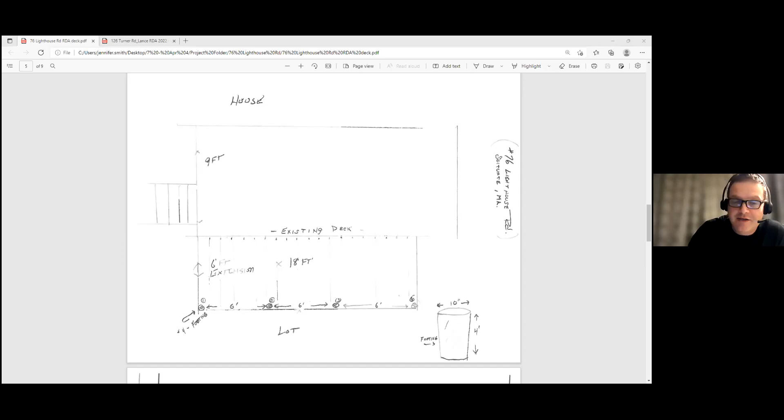Brendan - yeah, it looks good to me. Penny - nope, all good. Do we have anybody in the audience for this?

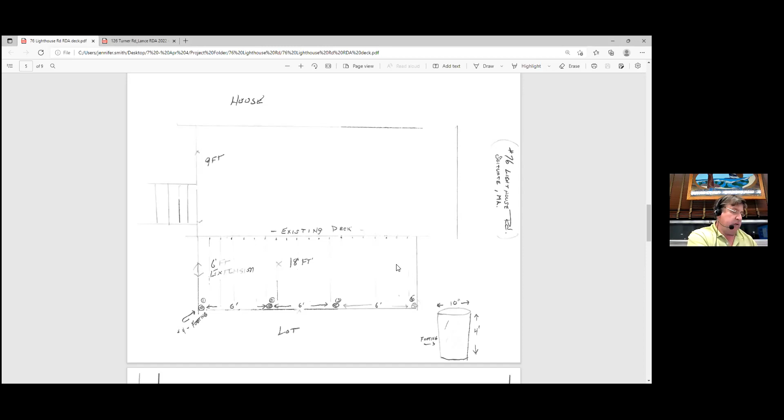Seeing none. Frank - okay, so this is an expansion of something in a resource area. It's a simple deck with sonotubes, so it's not like it's any coverage of anything significant. I didn't go out to the site. Do we know if there's any other issues on that site, Amy? It's lawn currently, and there's nothing that I've encountered on this site.

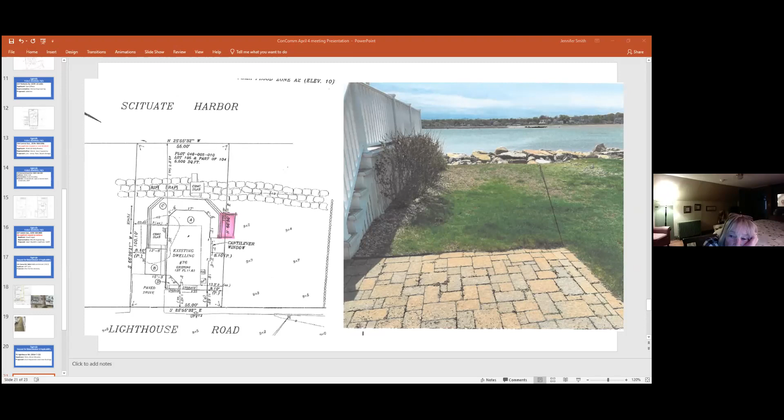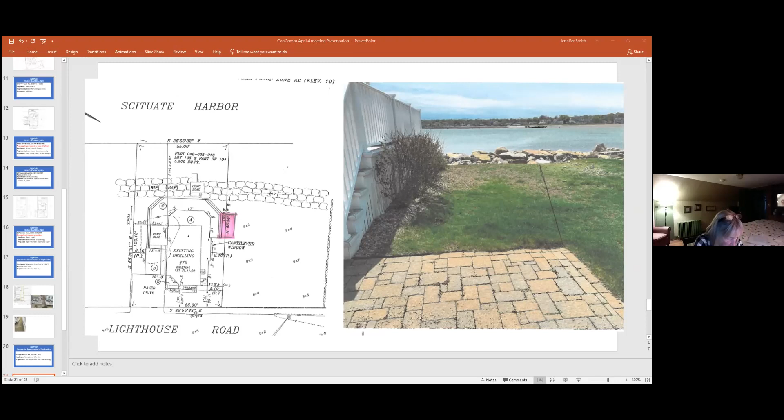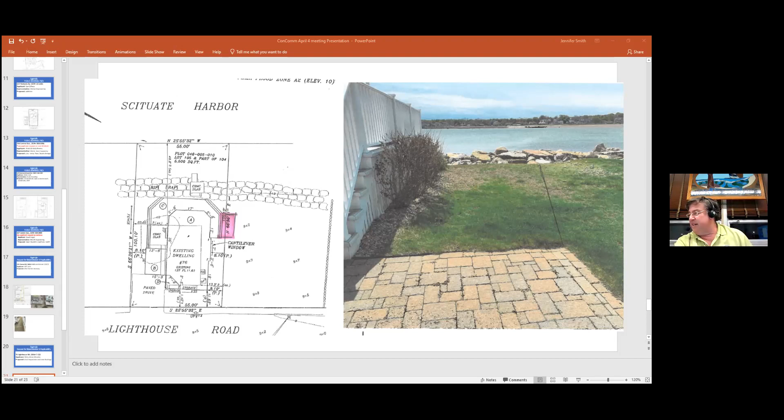Looks good. I make a motion for a negative 3. Do I have a second? Second that. Brendan beat me to it. All in favor? Jen - yep. Andy - yes. Frank - yes. Okay, thank you.